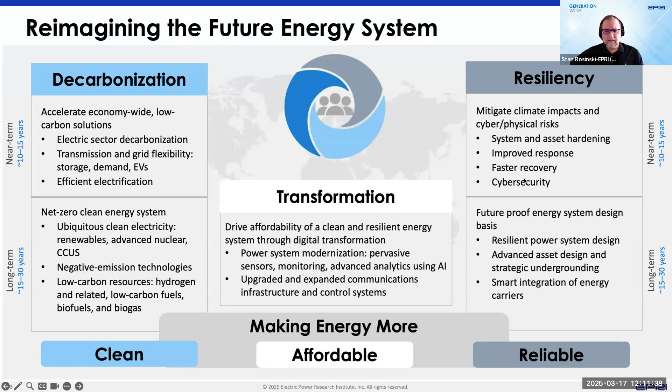We're looking at near-term activities, such as what might be happening in the 10 to 15-year time period. Decarbonization, of course, is certainly in the forefront of a lot of discussions. Resiliency of the climate, or of the energy grid and energy system, is also a critical aspect. But as we start looking into longer term time periods, such as 15 to 30 years, we really believe there will be a transformation of the energy systems. We're going to be focused more on net zero clean energy production, but we also make sure that future energy system is resilient and utilizes smart integration of energy carriers. And again, we want to make sure that our energy system is affordable, reliable, and clean.

Okay, with that, let me start the overview here and get into a little bit of some of the global trends that we're seeing.

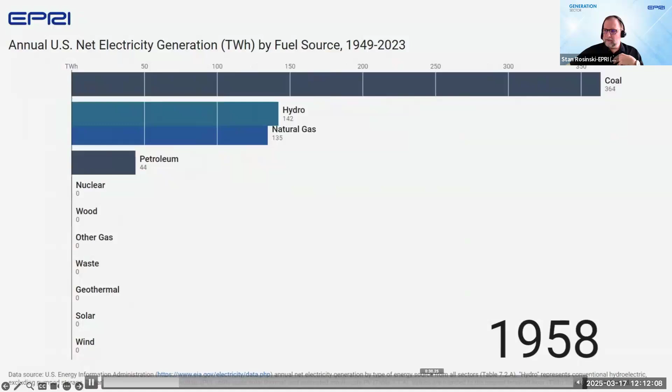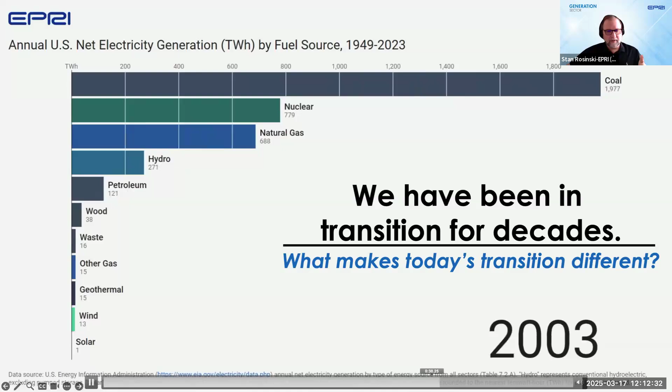I wanted to show this because we have been in an energy transition for decades. As you can see from the chart, starting in 1949 through roughly today, we've seen a change in the energy resource mix, the different energy technologies that are dominant. Coal has been king for decades, but it quickly becomes overtaken by natural gas. Nuclear is still a relevant contributor to the energy supply in the US, but now we also see solar and wind as more significant contributors, whereas decades ago they were not even really part of the equation.

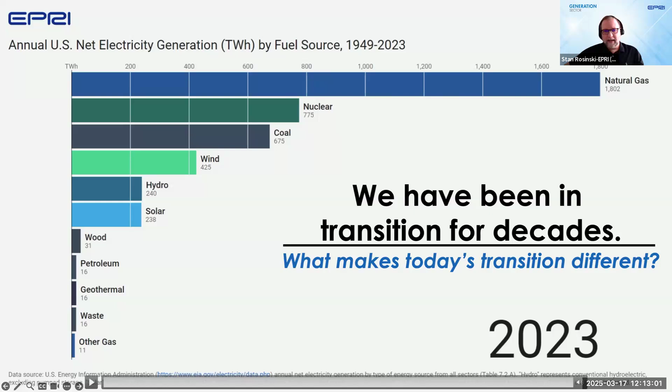So what makes today's energy transition really different, since this has been happening for quite some time? I think this decade really represents what we call a perfect storm of both challenges and opportunities. What do we mean by that? Well, we're seeing demand growth accelerating significantly. I'll talk about that in a minute.

We've seen more severe weather events that are continuing, and in some places getting even more severe than previously. Many countries have aggressive carbon goals in place. I'll talk about some of that in the US as well. Granted, there is some uncertainty as to what may continue with any administration, but at least I want to set the landscape of what the situation looks like today.

We also have a situation where we believe there are new technologies that can get us to a decarbonized, net zero energy supply that are needed, but they're not quite ready. They're still in development stage. Some may be in demonstration stage, but they still have a ways to go. We need to accelerate that. And of course, at the end of the day, affordability and reliability is critical.

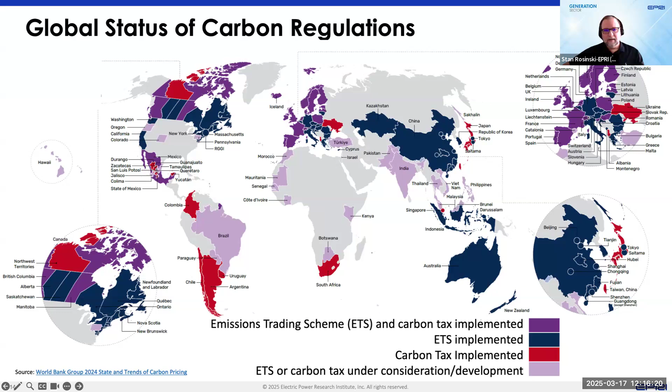But we need to step back a minute and look at this on more of a global scale. What I'm going to show here is for those G20 countries, their electricity supply. If you look at the amount of electricity generated over the last 24, 25 years or so, as you might expect, as you see demand increase with more industrialization and different industries, you start to see a general increase in electricity demand.

A couple things are interesting in this graph, though. Nuclear has remained fairly stable over the last 20 years. All those countries in the G20 group that have nuclear are maintaining those technologies. License renewal, that Ramesh and I were both involved in the early days, has been effective in keeping the existing plants operating. We will get into some of the newer technologies we foresee as well later on. So nuclear has remained fairly stable. It used to be a much larger percentage of the electricity mix, and now it's only about 10%, even though the amount of electricity produced has remained relatively constant.

You'll see a couple other interesting aspects as well. Solar and wind, which are the top yellow and green bars, has increased dramatically, and that's a very common theme across many of these countries. You see a very significant increase in the amount of renewables. In fact, in the G20, it's about almost 120 times increase. Now it's still a relatively small percentage, but that is a trend that is going to continue.

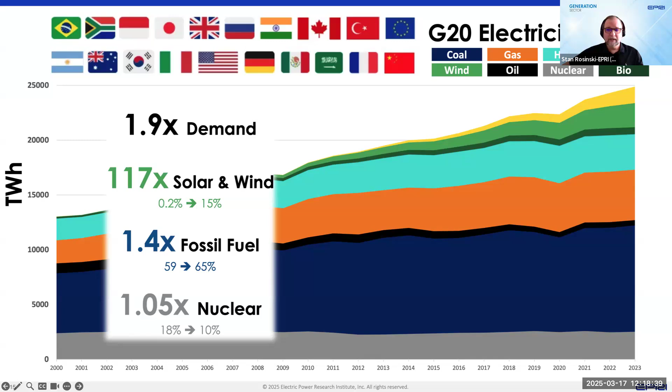Fossil fuels, which is rather interesting, is still increasing, but that almost seems contrary to what we understand, because we think that in the US we've seen many coal plant closures. Europe, Canada, other countries and regions have decreased their coal, but we're still seeing an increase in fossil fuel use if you look at it on a global scale. We'll get into that here in a minute. So let's look at percent electricity by source.

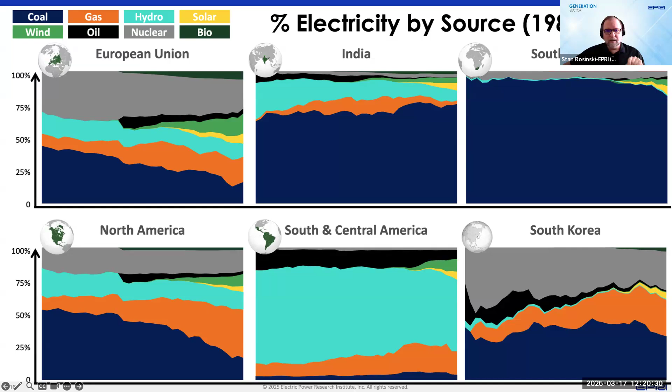So understanding how energy is going to be part of the decarbonization transition moving forward is not going to be the same for every region, or even every country, or even every region of the U.S., which I'll show you in a few minutes. One country I did not have on here is China, but needless to say, very similar to India in a very strong increase in the amount of coal generation.

So I think what this information really starts to get across, I hope, is that there really is no single energy supply technology that's going to be the solution. Optionality is really not an option, it's really a requirement. We have to have a broad variety of energy producing technologies. We also want to try and decarbonize those, but we cannot rely on any single option.

And this really gets me to what the theme is going to be through the remainder of the talk today. I'm doing these in terms of 5 what we call practical realities. The first one that I'll touch upon is that we need to use all these tools in our toolbox so that we can still have a reliable and affordable energy transition.

We are going to have to, in the future, rely on new energy technologies, but we need to learn by doing. As you have new energy technologies in the demonstration phase, if you look at historical development of energy, it takes a decade or two before those technologies really start to become mature. You need to have multiple demonstrations that have been put in place that are successful, so that the industry as a whole can learn from those new technologies that are being deployed. We want to try and accelerate that if we can, but that's a very important step, and that does take time.

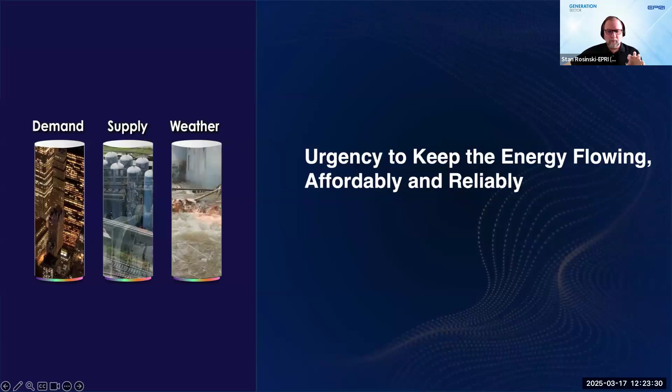So these practical realities, I'll start diving into them now. These practical realities are really applicable with the backdrop that there is an urgency to keep energy flowing. It has to be affordable, it has to be reliable. And in fact, we're going to see this urgency and demand for electricity increase significantly in the future.

Let me start by setting a baseline here and showing what the capacity in the US is today. Now, it's important to make the distinction between capacity and actual generation. And that really comes into play when you're looking at the renewables technologies.

When you're talking about a thermally based technology, such as natural gas combined cycle plants, coal, combustion turbines, nuclear, and even coal plants that may have been converted to natural gas, which would be the gas steam turbine area, those are considered dispatchable technologies that, unless they are down for maintenance or other outages, can essentially produce power 24/7. So for example, if there's 325 gigawatts of natural gas combined cycle capacity, if all those plants are operating, they're producing 325 gigawatts of power.

When you look at renewables technologies, you have to consider the fuel source, which is an intermittent fuel source—so solar and wind specifically. Batteries somewhat, because they also have to be charged generally by the renewables. Those are considered intermittent resources. So even though a large capacity may be available, it stands to reason that if a region of the country has a large amount of wind available, if the wind's not blowing, then you're obviously not producing the energy. So it's just a distinction to keep in mind between capacity and generation, and you'll see where that comes into play a little bit later.

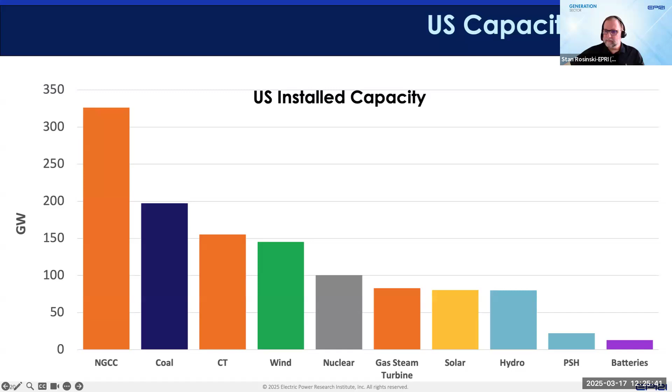But this is our landscape of what's available today.

Now, going forward, everyone's been talking about artificial intelligence, right? The race is on. It used to be that the race was on to see who is going to have the AI technology, or can we develop AI technology. I think what we're seeing now is that's really not the relevant point. Now it's going to be, how are we going to power this AI revolution? And that's going to be a significant change.

If we look at some of the historic information in terms of data centers, even back in the early 2000s, when social media really started to become more widespread, we saw a slight increase in the demand for electricity. But it was something we were able to handle with our existing technologies, and it wasn't that critical of a concern, especially when you couple it with efforts such as energy efficiency initiatives. Over the last maybe 15 years or so, we saw a little bit of an increase again in terms of data center growth due to cloud activities, cloud-based services.

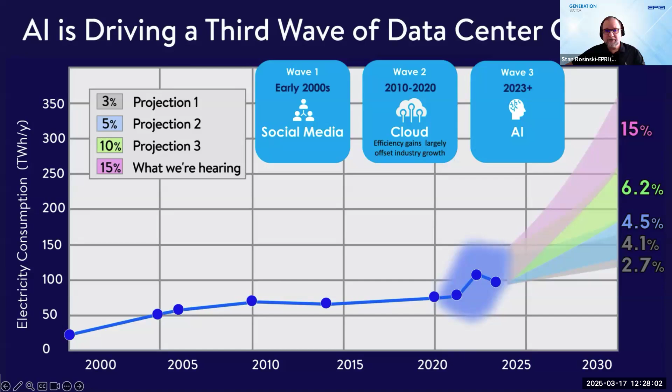The real change is going to be what's happening now with AI. There are several different projections available in the industry, anywhere from an anticipated 3% growth up to about 6% growth in energy demand just due to data centers. However, what we are hearing from our members, which are generating companies specifically contracting with data centers for power supply, is that we could be seeing up to about a 15% increase in demand. That is a tremendous amount of growth in energy that's going to be required, primarily due to anticipated growth in data centers. Is it going to be that high? Nobody knows, but it does represent a significant increase in what we think we're going to see in terms of demand.

So what can we do to meet this demand growth? The point I want to get across is that no single technology is going to address this demand growth. We're going to have to use all the tools we have—in other words, all the energy generation resources we have in our toolbox today—to try and meet that demand growth for some period of time, until we can start to see advanced technologies become more widely deployed.

So this gets us to our first practical reality. Again, we need to use all the tools in our toolbox, all the energy resources available to us today. We have to use those and keep them as reliable and affordable as we start to use them into the energy transition. So let me focus on a couple different areas regarding this practical reality, and I'll start by looking a little bit at the renewable area. As everyone might expect, renewables has increased significantly over the last 20 years or so.

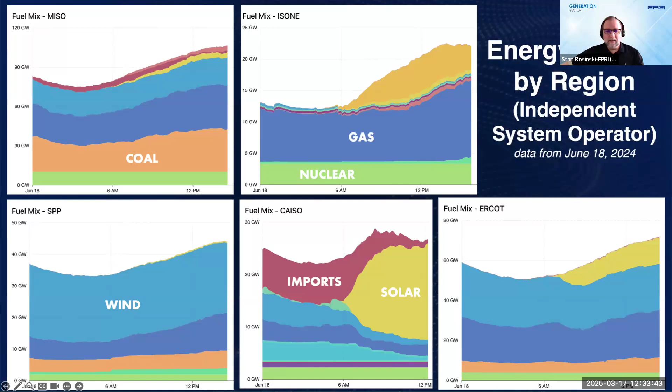I think California is an interesting situation, where in the early morning hours, you import a lot of energy into California until the sun starts to come up. You can then generate a massive amount of energy through the existing solar facilities. You start to ramp down all the other power plants, until solar goes offline, and then it's needing to import energy again.

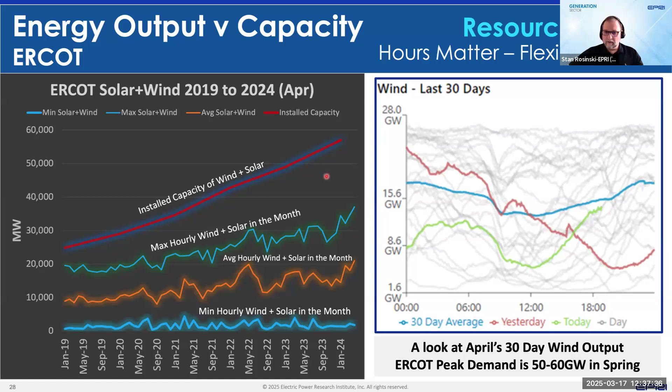Even though renewable deployment is increasing and has the potential, on average, to provide significantly more energy, there are times when it's not going to provide that energy, which means there needs to be sufficient backup generation resources to account for that, or you may get into a situation where you have to do load shedding, or you may not be able to otherwise meet the demand.

This really came into play, and there's a couple things I want to talk about here: Winter Storm Uri, which happened in February of '21, so 4 years ago now. The ERCOT grid was actually just a few minutes away from complete grid collapse.

Fortunately that didn't happen. But looking at what's happened in ERCOT over the last 10 years, the installed capacity of nuclear has remained the same. There really was no solar in 2011; by 2020, you had several thousand, maybe 6,000 megawatts of solar. Coal plants have been starting to shut down, so you see a decrease in coal. You see a tremendous increase in wind generation capacity over that time period. Natural gas has remained relatively stable.

During Winter Storm Uri, I'm showing data here in the middle of February, so this is still winter months. If anybody remembers that storm, it was an extreme cold spell during that time period in ERCOT, which isn't something that happens very often but is still considered winter timeframe. Because of the time in the evening and the weather conditions, there was no solar generation and virtually no wind generation.

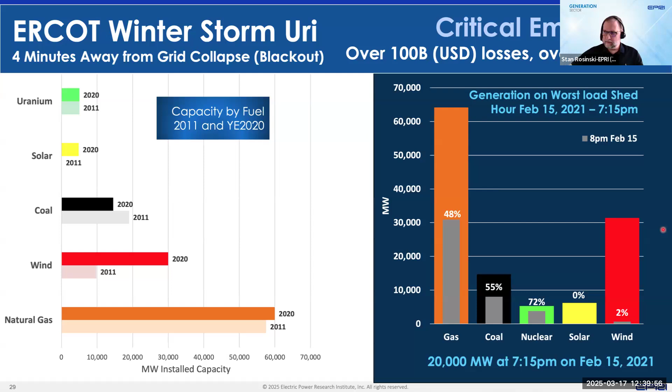Because of that, and because there was some load shedding, actually some of the gas plants had to shut down as well. But there was significant load shedding because of the inability of the existing power supplies and energy resources to meet the demand. Now, this is an extreme case, and of course it happened during a time when you might expect weather extremes, very cold or very hot temperatures.

However, this also happens in what we call some of the shoulder time periods. If you're looking at the April, October timeframe, that's when many thermal plants will do their annual, or every couple of years, outage for maintenance and repair activities, generally because demand is always considered to be less during those time periods—not very hot, not very cold. That's why we call them shoulder months.

But there have been more instances now where we're starting to see load shedding in these non-peak times, partly because of the combination where wind and solar generation may not be able to produce their maximum potential output due to weather conditions. And if that's the case, with limited backup generation, the only alternative is to start load shedding. So we're starting to see this happen more often.

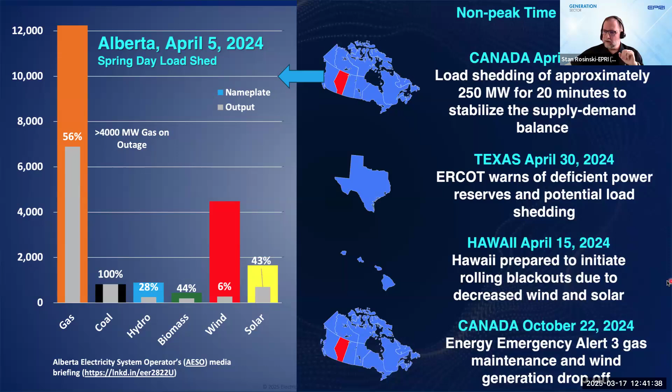Certainly, energy storage is one of those newer technologies that we think will have an important role to play to help shore this up. But again, we're having to meet some of these challenges of the industry, such as data center development, with what we have available now. So these are challenges that are going to be there for a while.

On top of this, we also have environmental regulations. The 111 environmental rule from the EPA came out a few years ago. I don't know the status, if this is going to be rolled back, but needless to say, if this rule stays in place, it may have a significant impact on available generation.

Basically, this rule requires that carbon capture and storage be implemented in coal facilities, and more specifically for gas facilities, to reduce carbon emissions. If we look back in 2023, we had about just under 200 gigawatts of coal capacity available. According to the regulation as it stands now, that would significantly start to decrease in 2030, with all coal essentially being gone by 2034.

If you looked at what the plan for the normal retirement of these facilities would be, there's a significant amount of this dispatchable generation capacity that we are going to be missing. So what is going to make that up?

Very likely that would be made up by increasing natural gas combustion facilities. And those will also have to have carbon capture and storage installed as well.

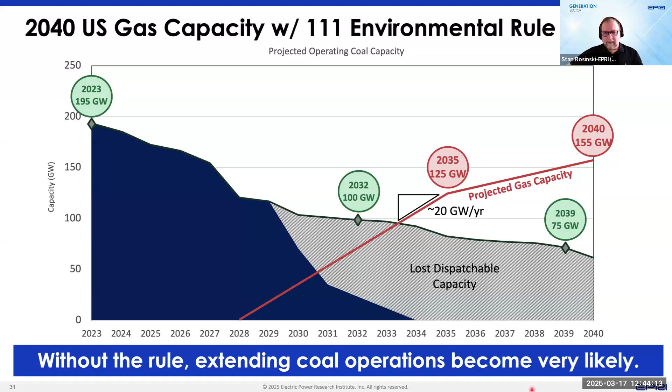Now, that seems all well and good, but the challenge there is some of the supply chain issues that we are starting to see, not just from a materials perspective or from a workforce perspective, but as an example, for the last five years, 2019 through 2023...

If we look at the total number of orders for gas turbines from the main gas turbine suppliers, we see that in the Saudi Arabia region and in the Gulf region, we had about 11,000 megawatts of capacity ordered. Just in a 3-month period in 2024, we've already seen almost that amount being ordered for new facilities in Saudi Arabia. Tremendous energy production expansion underway.

What this is signifying is that the supply chain, just to order gas turbines, is being challenged. Production is not able to ramp up sufficiently. So what this means is, if you dive into this deeper, a larger number of the existing orders may be taken up by areas outside of the US, which means the remaining available supply is either going to be longer-term lead time to acquire, and it's probably going to be more expensive. So there are supply chain challenges that are going to come into play here as we move forward.

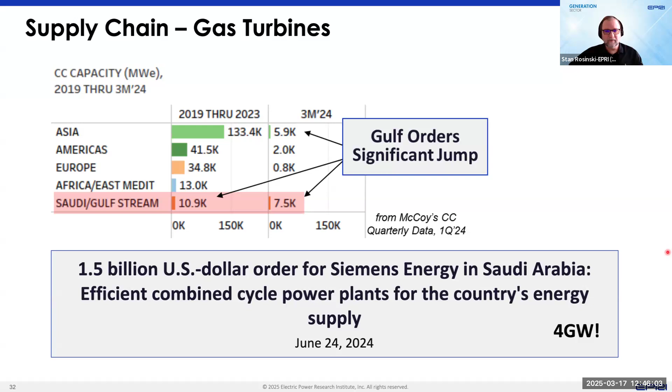All right, so let me wrap this up for this first practical reality. This is the longest one of the group.

If we look at the existing technologies we have now in our toolbox - existing coal, the gas fleet, hydro, and some of the other renewable technologies plus nuclear - they have been in operation for decades, some of them. They're either already being scaled up or they're in operation. In fact, many of those are looking into the area of: can we repower, can we retire, can we refurbish these activities or these generation resources?

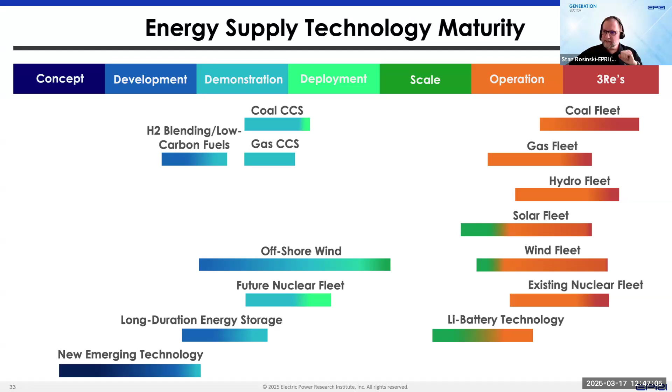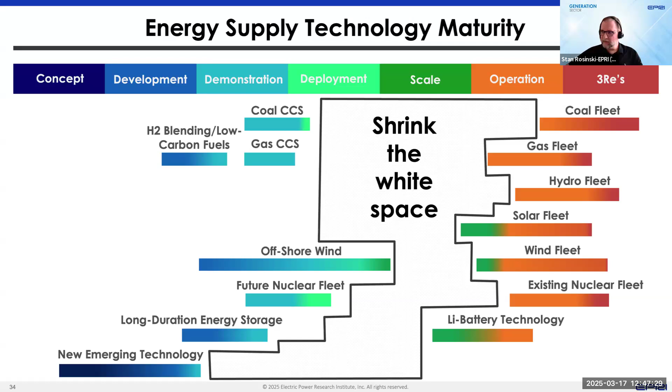But there's a large number of emerging energy resource technologies - coal plus CCS, being able to put carbon capture and storage on an existing gas facility, advanced nuclear, long duration energy storage. Those are still in various aspects of development. The trick is we have to shrink this white space. As I mentioned before, that's usually a 10 to 20 year period, needing maybe 10 to 12 of these plants to be ready to be deployed so we can get up the learning curve in these technologies. We have to shrink this white space and try to accelerate the deployment of those technologies for decarbonization.

So I would state that there's really an urgent need to accelerate some of these dispatchable technologies that are coming in the future, whether it's long duration energy storage, hydrogen, or advanced nuclear.

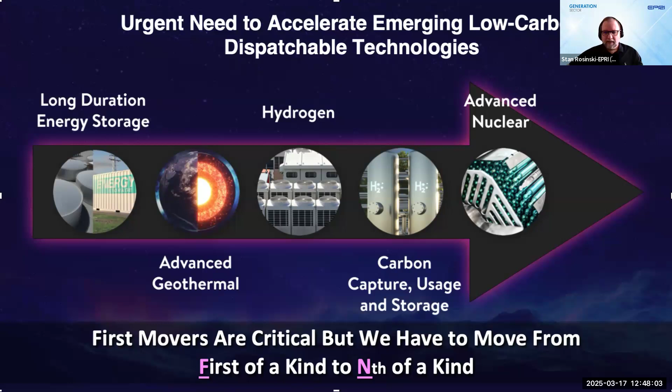Certainly the first deployments of these are critical, but we have to move from the first of a kind to maybe Nth of a kind before we can develop that understanding and best practices to make these viable in order to provide safe and reliable energy.

So this leads us to our practical reality number 2. We really need to enter the learn by doing stage for some of these emerging technologies. We need to jump in and collaboratively work with our industry members to try and learn from some of these first movers. I've got just a couple examples here that I'll show you.

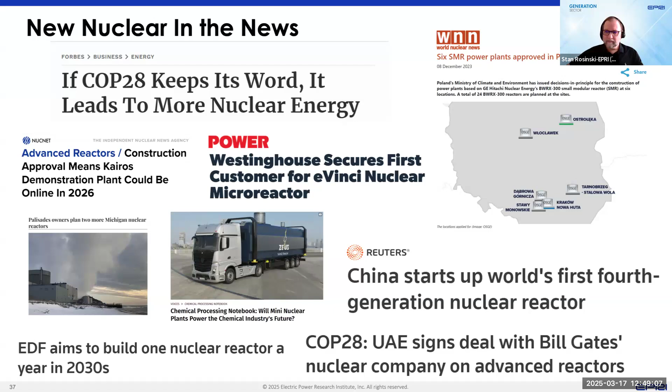I can't talk about all the technologies, but there is a significant amount of new nuclear technologies in the news. I think we've all been familiar with some of the Generation 4 technologies, advanced gas, high temperature reactors that have been under development for decades. Also, small modular reactors seem to be gaining a lot of momentum. But there does seem to be a lot of discussion in the news focusing on new nuclear.

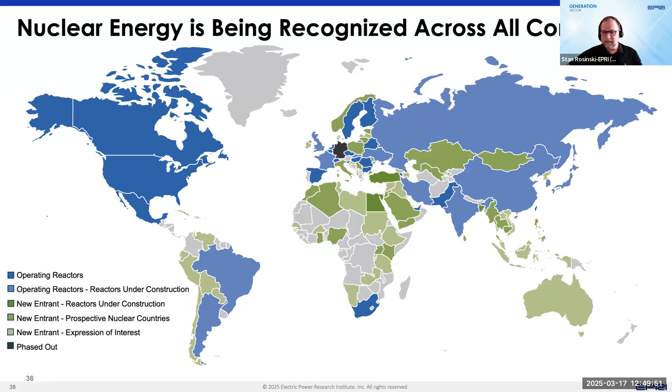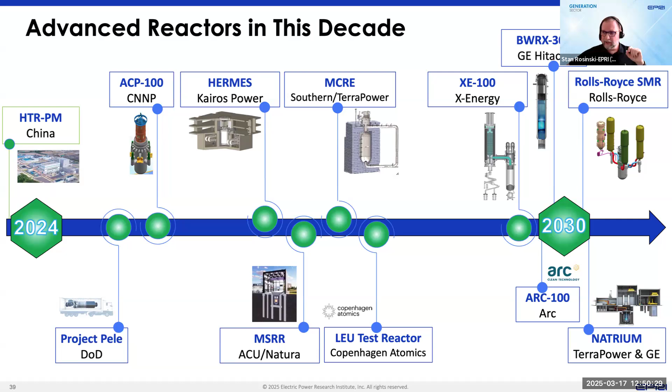Another aspect is looking at energy storage. I mentioned before that it's very important for the industry to effectively deploy reliable and affordable energy storage technologies. That can help address some of the issues in terms of having available backup power for intermittent renewable resources when conditions are such that their production may diminish.

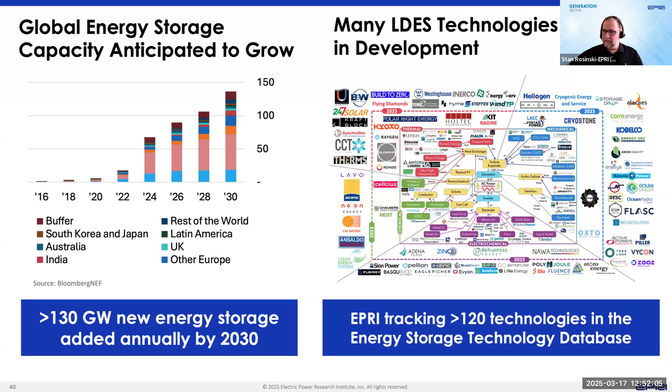You can see this is just a scatter plot of all the different company logos, but looking at batteries, novel battery techniques, also looking at thermal energy storage, where you may have concrete blocks that contain tubing where water might be put inside, maintained at a very high temperature and pressure, so that is a heat transfer block, if you will, a storage block in which the energy can be removed.

In addition to looking at some of the newer long duration energy storage technologies, I mentioned another aspect is existing power facilities can look at either retrofitting or perhaps repowering as well. There's some actually very exciting activities going on here.

If we look at, this is, I believe, the Hekinan power plant in Japan. They are working with IHI and they've already completed a successful demonstration where they replaced several of the coal burners in this plant with burners that would co-fire ammonia with the coal. It turns out that ammonia can be a very feasible drop-in fuel. They are continuing with this demonstration to go up to 50%, and ultimately they are targeting 100% ammonia generation as a fuel in an existing coal facility.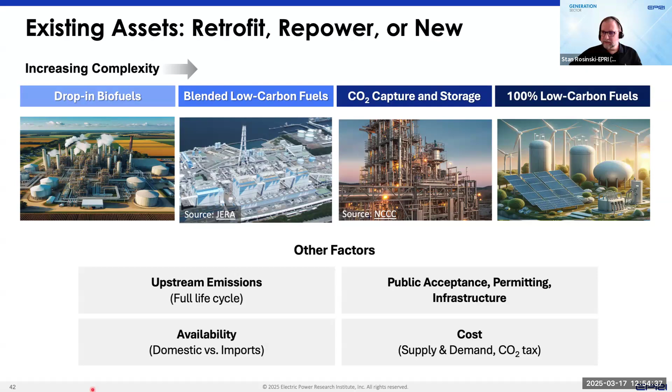There's quite a few coal facilities in the world that have been repowered with natural gas. This is just taking it, I think, one step further. Of course, CO2 capture and storage is something that we think can be added to these facilities, ultimately leading us to 100% low carbon fuels. Hydrogen, of course, is a big player there as well.

So again, it's really time for us to learn by doing. This is something we're emphasizing in some of our activities within EPRI, working with our industry colleagues. We want to enhance innovation, maintain cost efficiency in some of these advanced techniques, and address some of the regulatory risks and issues that may apply. It really does take a coordinated effort across the industry.

Okay, this gets me to practical reality 3. We're in the home stretch here. We need to advance tools and approaches. In other words, we need to enhance innovation so we can make some fundamental changes in the supply chain, also looking at workforce issues and to support the energy economy as a whole.

Just to give you an indication of some of the challenges regarding supply chain, I mentioned a little bit of that before with some of the gas turbine orders we've seen in the industry. If you look at the Magnificent Seven, the big tech companies we're all aware of, they have over a $13 trillion market cap. The top 100 electric companies only have about 20% of that market cap. So when we look at supply chain competition, who's going to be the elephant in the room here? It's probably not going to be the electric companies.

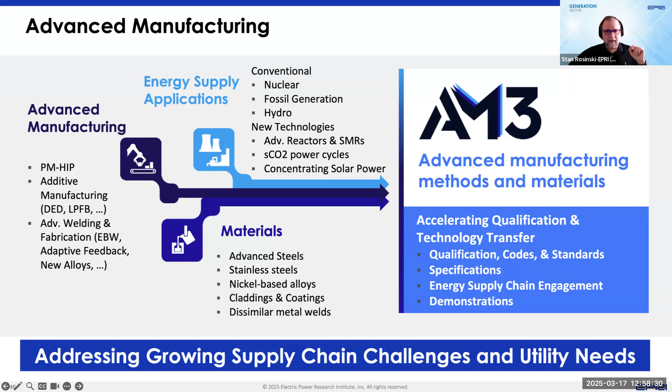If we do that, we can create some of those unique configurations that may no longer be available. We can reduce the cost, we believe, by being able to produce something that's near net shape to begin with, minimizing the amount of welding or machining that may need to be done. We really think this can have an impact on both conventional power generation and also some of the new technologies coming online.

Of course, codes and standards is a significant element of that as well. There are some demonstrations underway right now through the companies, through EPRI, and participation with the companies you see on the screen. A couple of the examples, using powder metallurgy and hot isostatic pressing, we can do pressure reactor heads on the nuclear side.

So far, the demonstrations we've done, we can eliminate thousands of hours of machining capability, which means we can get the part produced faster and less expensively than what was done in the past.

Right now, if you wanted to put an order in for a forging, you can have up to a 5-year wait among available suppliers for that type of component, whereas you might be able to do it in less than a year if you follow some of these advanced manufacturing techniques. There's others too, electron beam welding, and diode laser cladding, which can put cladding on the inside of pressure vessel materials for corrosion protection at significant cost reduction.

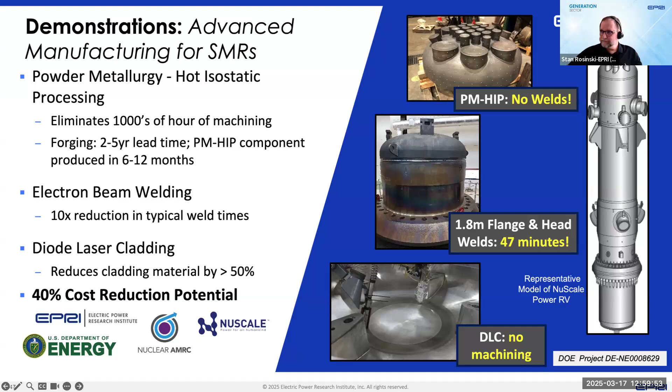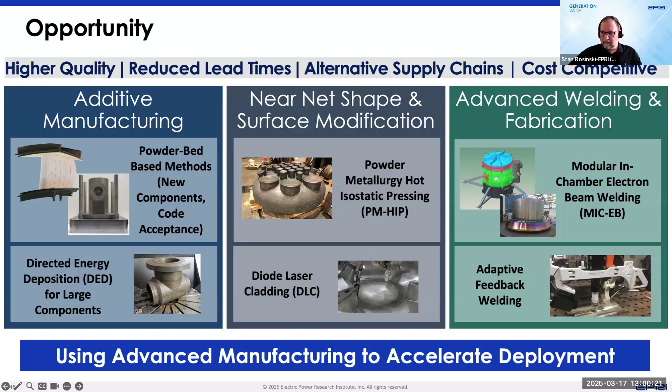There are opportunities here, we think. We are working with universities across the country and with various industry partners to try and accelerate development in these areas. There's a lot of opportunity for continued development, and I encourage anyone who's interested in materials—this is a field that's going to expand quite significantly.

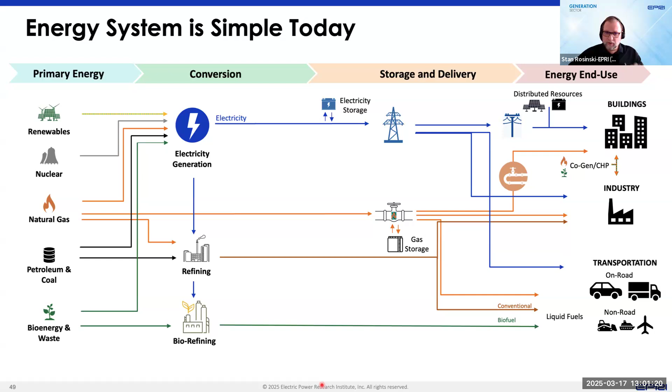Those energy sources, primarily through delivery mechanisms, go into our industries of today in end use, whether it's buildings, transportation, industry, et cetera. What's this going to look like in the future, if these regulations we see, some of the environmental concerns, and new technologies being added—it gets significantly more complex.

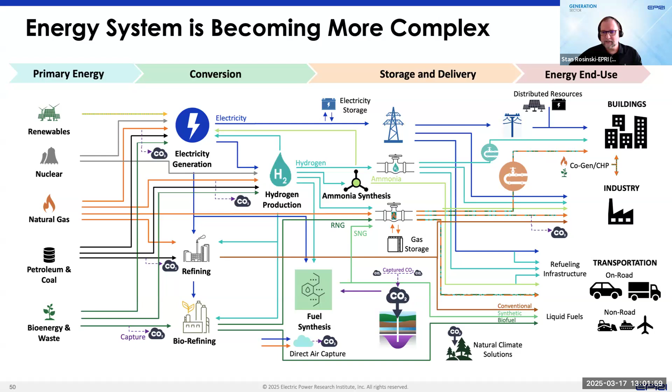We will have CO2 reduction, carbon capture and storage applying across almost all of the thermal power generation sources. If we are going to proceed with a hydrogen economy and also perhaps ammonia as a fuel, there's significant energy required for powering those aspects of the industry. We might also be looking at things such as direct air capture for additional CO2 sequestration efforts. It's going to be significantly more complex.

I think that gets us to our practical reality number four: we need to leverage solutions beyond just what's in our power sector if we're going to try and achieve some of these net zero goals.

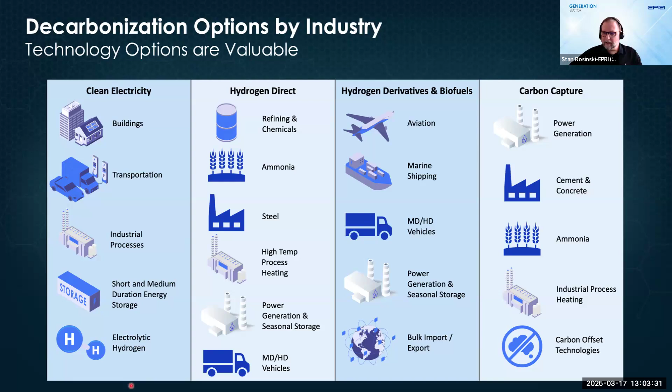And also, I think some of the short and medium duration energy storage options that will be coming down the line will help again in developing clean electricity as we move forward.

My emphasis here is that we really want to have an integrated approach to decarbonization. We are going to have to use all the different technologies that are available. If one is seen to be less effective or less reliable, or from an economic perspective not as feasible as other technologies, we want to have that flexibility so that we can still maintain a reliable and affordable energy economy, but still maintain resilience.

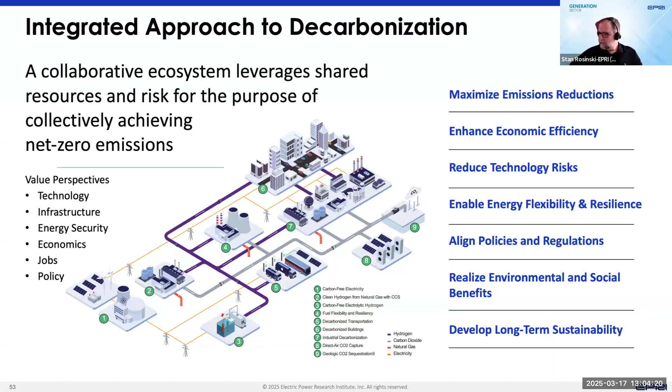All right, that gets me to the last practical reality, and then I'll have a few closing comments. There really is—and I said this at the beginning, so hopefully I've demonstrated what I said at the outset—there really is no one size that's going to be the solution for what we as a society are trying to do in terms of decarbonization.

We must maintain affordability and reliability of the energy system, both now and in the future. But we need to be innovative to try and transition that existing fleet of energy resource options through new technology development into a decarbonized system in the future. There's a lot of pathways that we can take down that road, and that's exactly what I want to touch on in my closing comments.

The program that I manage at EPRI is called Generation Transitions. If you visualize the generation fleet of today, our existing generation technologies, on the left side, at some point in the future—maybe it's 2050, maybe some other time period—our target is a net zero generation fleet that's reliable, affordable, and shows resilience for some of these weather conditions that we're seeing that may continue.